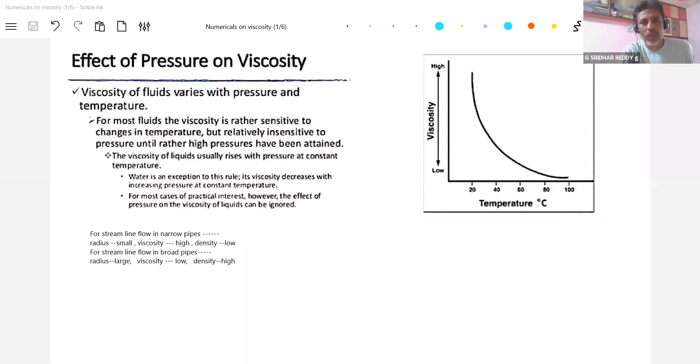Some small theoretical information. Just read once, I'll explain it. Regarding viscosity, how it will vary with temperature and pressure. It's just information, it is there in most of the NCERT books also.

Effect of temperature on viscosity. Okay, first let me explain this, for most of them relatively insensitive to pressure until rather high pressure have been attained.

So now if you look at most of the liquids, what will happen to the viscosity? It will decrease. What do you mean by viscosity? The force of friction that is exerted by the adjacent layers to oppose relative motion between the layers. Where do we see this viscosity? For liquid only. If a liquid is in motion, the adjacent layers will exert force on each other to oppose relative motion between the layers. This particular property is called viscosity.

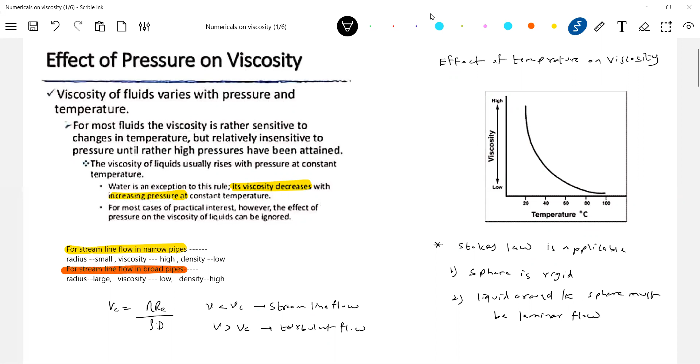No, no, no, don't neglect the radius. How can you neglect radius? It should not be that way, just accept the data. This is one basic condition: the liquid around the sphere must be laminar flow. Next, what should be the boundary of the liquid? Infinite boundary of liquid. The boundary of liquid must be infinite.

These are very primary conditions for Stokes law to be valid, and theoretical things they may ask you. This is data we should have as information, because as a student, I think in exams it's not possible to derive everything, so this theoretical information, if a student remembers it, it'll be much easier. Stokes law is something very important. There's a strict condition: if there's some elastic body and you release it, Stokes law is not applicable.

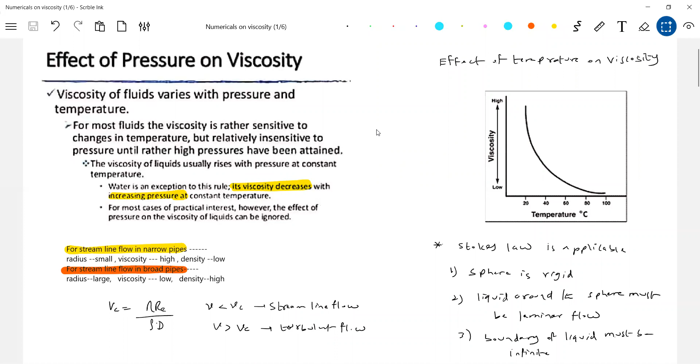Okay, let's take a few simple questions. And now if we have... I'll move this plate.

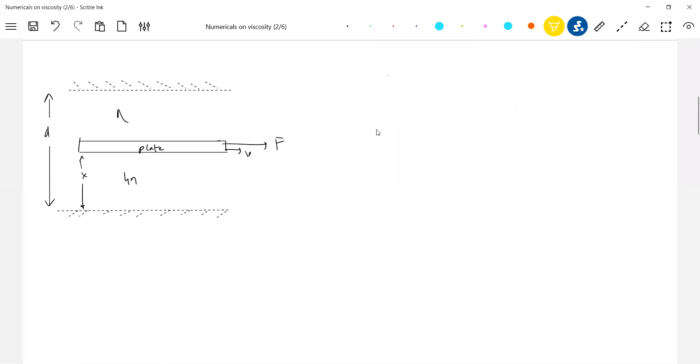What minimum force can I apply so that the viscosity below the plate is 4 eta, and above the plate is eta? At what distance, and what is the minimum force, should I move the plate? Everywhere there's liquid, below there's liquid, above there's liquid. So where should I move this plate so that the liquids will not mix up? I hope you're able to understand.

So with what minimum force can I move this plate? Let A be the area of cross section of the plate, as you can see it's a rectangular plate.

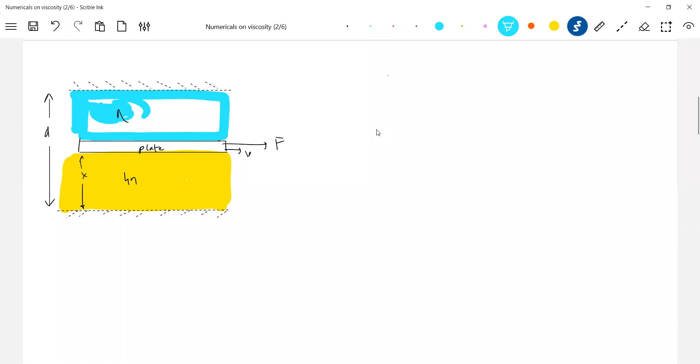Okay, now try to work this out. There'll be viscous drag by both the liquids, no? Let me extend this plate so that you don't get confused.

Try to think, meanwhile I'll finish this shading. The liquids, I'm not permitting them to mix, so you can choose the distance. The coefficient of viscosity below the plate will be 4 eta, above the plate will be eta, and this everything is a plate. The coefficient of viscosity will be adjusted accordingly.

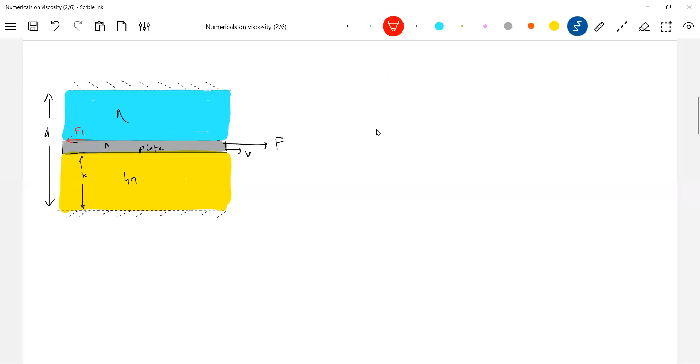Let A be the area of cross section. So there will be two forces acting, one above, one below. So what is F equal to? Total net force should be F1 plus F2. What is F1? Eta A (d minus x) into V... this will be 4 eta A V by x.

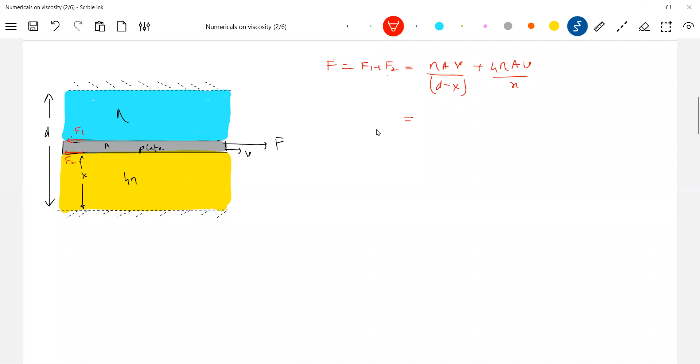If I take eta A V outside, this will become 1 by (d minus x) plus 4 by x, so this becomes eta A V times [x plus 4d minus 4x] by [x into (d minus x)].

Wait, I think it will become a very lengthy calculation, so let me do it here. So what is being asked? What is the minimum force I should apply to drag this plate?

So let me differentiate this. dF by dx is equal to eta AV. Okay, this will be minus of minus, this will be plus minus 4 by x square.

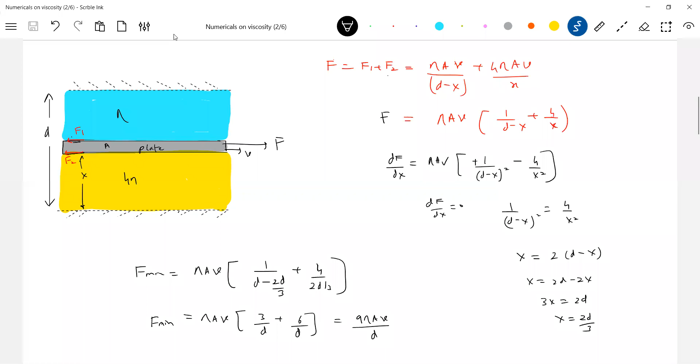Let me take some simple questions. Read it once. Read the question, I'll just shade the diagram so that it'll be easy for you.

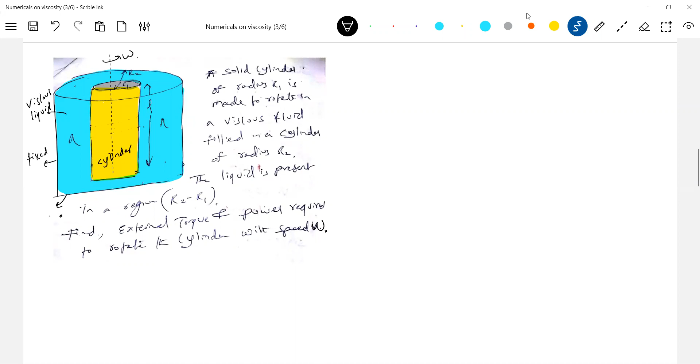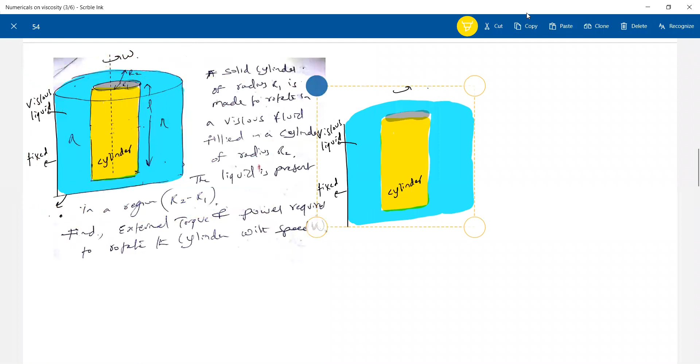Okay, now let's do one thing. Shall we? I think I need a diagram. Okay, I'll redraw the diagram.

Okay, shall we get into the calculation part? Okay, let me assume some DL, I'll write it. We know all the radius that are given. Okay, now what is the torque acting on this one? First, what is the viscous drag acting on this one? So let's calculate the force on this small element.

Df is equal to eta area dA. What is the velocity of that? Will be V. At what distance will it be? R2 minus R1.

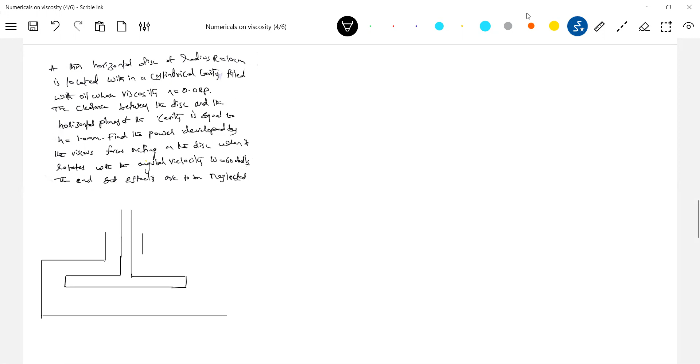Okay, there's a liquid. Okay, fine, this much is there. Make observation of things. So this is that particular disk which I'm going to rotate here.

Hope everyone will know what is a disk. A horizontal disk, that horizontal disk is this one. It is having radius R. There's a viscous liquid.

Read the question and get into it. All these are some good geometry based problems, so you're supposed to make observation of the diagram.

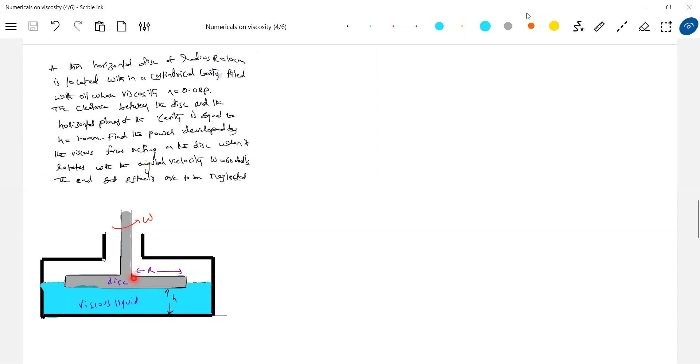What do you mean by the end effects? These things, because the liquid is in contact with the side walls, so these end effects are to be neglected. Only consider the effect of viscosity on the bottom surface of the disk. Top surface, there's no liquid, so no question of that. So as you rotate, the viscous drag will oppose relative motion.

Okay, let's directly get into it. There's a disk of radius r. I'm going to assume a strip.

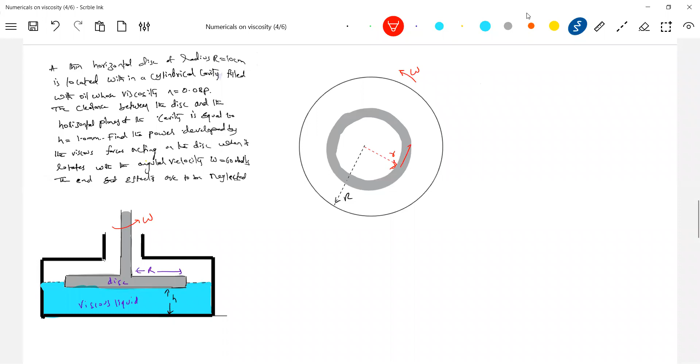Okay, this one, so let me assume a strip. Let the radius of the strip be small r. The disk is having angular velocity omega. The tangential velocity of this point should be like this, and what is v equal to? V equal to r omega. Proceed like this, have this much of information.

Okay, let's get into this one. Where the viscous drag will act - viscous drag will oppose relative motion, so it will act at all points on the ring. So let the force acting be df, that one. So there's a disk, and on the disk at the bottom, I'm assuming a ring of radius r, thickness dr.

Now what is the area of this one? So let's calculate the viscous force acting on the ring - viscous drag on the strip, on the circular strip. How much should it be? Df equal to eta dA into V by H.

Try to follow this. Sir, where is H? H is this one, no? You take any part of the strip, at what distance it will be from the bottom reference - at a distance H. What is V? Tangential velocity, because it's rotating, all points will have the same speed. What is dA? Area of the strip.

2 pi r dr. What is V? V is r omega by H. So this everything will become 2 pi eta omega H will come as it is, so r square dr. Okay, this is the force.

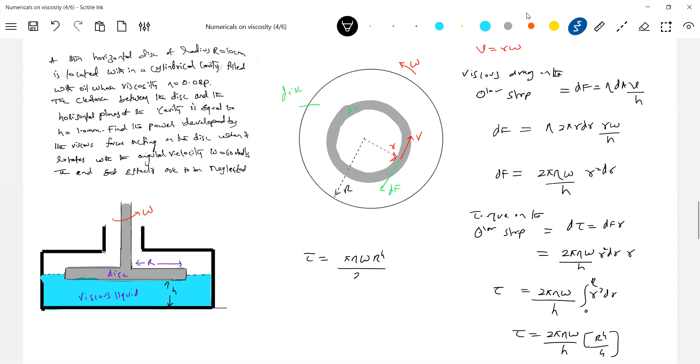So these are the things what we needed. Slowly getting the idea. This one, different types of rigid bodies will be rotating. What should be the disk? It should be rigid. If it is an elastic body, anything will happen. The radius will change. Then no longer we can write this one. So therefore, the disk should be a rigid one.

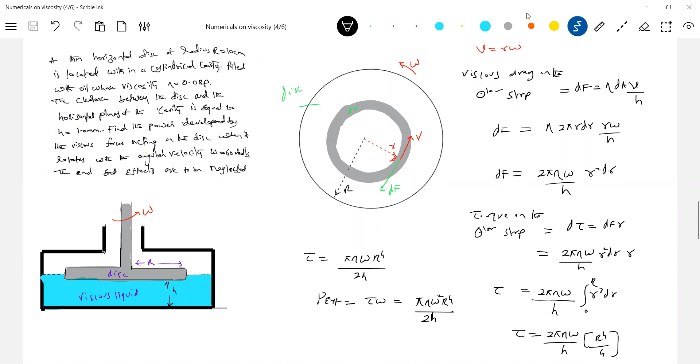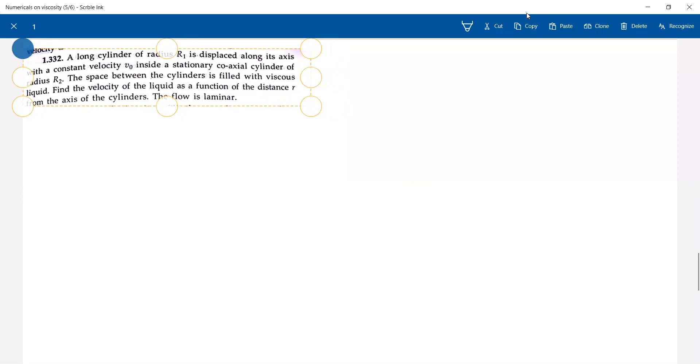Now I'll scroll down. Read this question. I'll give some time because I think read the question first, get some small diagram.

Is a long cylinder. So there is actually a coaxial cylinder. Let's have this one. So this is the long cylinder. Then I'm going to bring another contrast color. Okay, there's another cylinder which I'm going to drag. Both are long, both are long. So let me bring that axis here, and the axis.

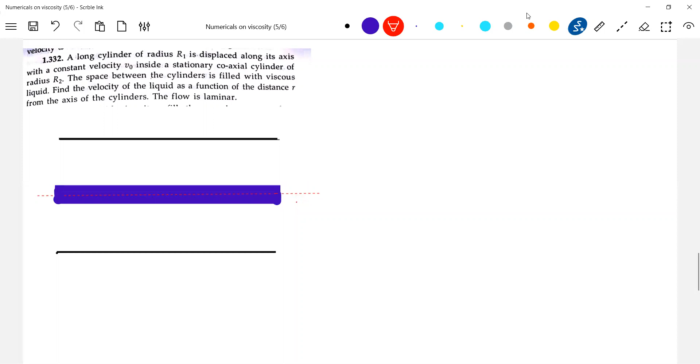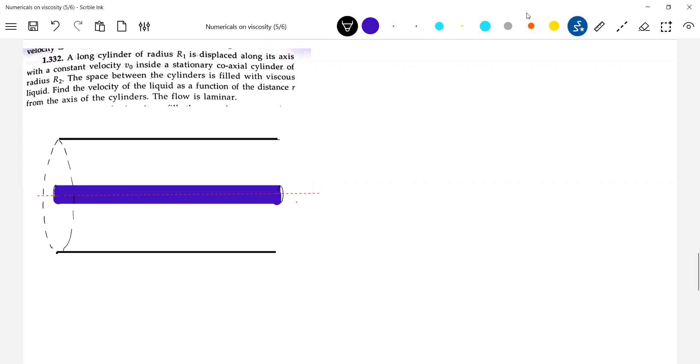Let's get into the. So what is radius R1? R1 is this one. What about R2? R2 is this. At least try to understand the question now. It is moved with a speed V naught. Where is the liquid? The liquid is here. Hope everything, intentionally diagrams are not given.

I'm going to drag this cylinder. So now he is asking that conditions. Once we are able to do such problems, next Poiseuille's equation will be easy for us with the help of these things.

Both are long, okay, I'm just showing some finite length. The space between the cylinders is filled with a viscous liquid. So this is the viscous liquid. So what is this? This is a pipe. This is a solid cylinder.

Able to understand the question now? No. So what is it asking? Find the velocity of liquid as a function of distance r from the axis of the cylinders. So he is asking now, there's a layer. So there'll be a layer. So what is the velocity of this particular layer?

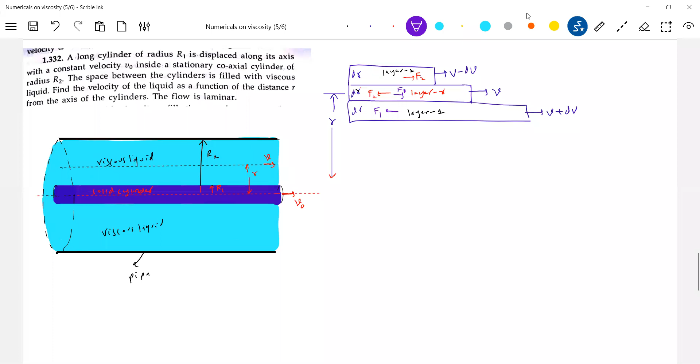It should be F1 minus F2. And what do you suggest, which will be greater, F1 or F2? F1 should be greater, so F1 greater than F2. So therefore I want the resultant force acting on them.

Now what is F1? Eta A. What is the relative velocity between them? Should be dv by dr. Similarly, what is F2? Eta A, V minus V plus, so it will be like V plus dV minus V. I'll write the relative velocity, or the overall expression.

Again, I'll be confusing, the net force I want: F1 minus F2. What is F1 equal to? Eta A, relative velocity between them will be dv by dr, minus of this, this will be relative velocity, eta A. Now please notice here, why the negative sign?

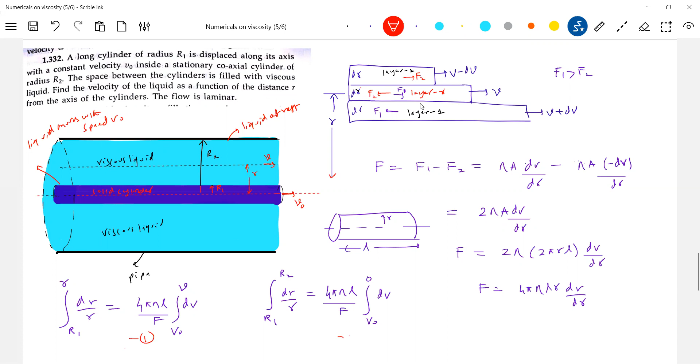So what do we get? dr... so this will become equal to how much? Log of r by r1 divided by log of r2 by r1 equals V minus V naught, minus V naught. Solving this, we'll get the expression for V. I think this will be 1 minus V by V naught.

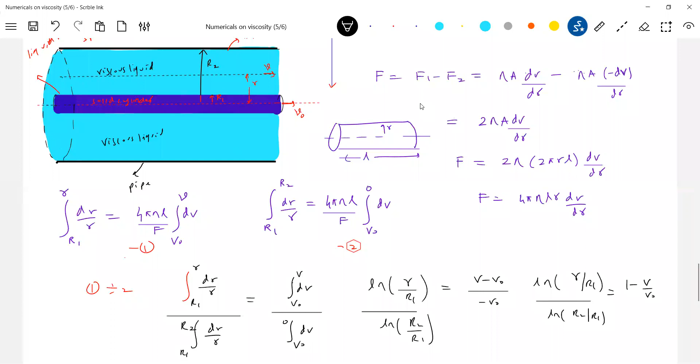So shall I write like this? V naught into 1 minus log of R by R1. This is the expression for the speed V. It's there in Irodov, I just picked up some very good information that's there.

Let me adjust it so that you'll not get confused. Everything is in order.

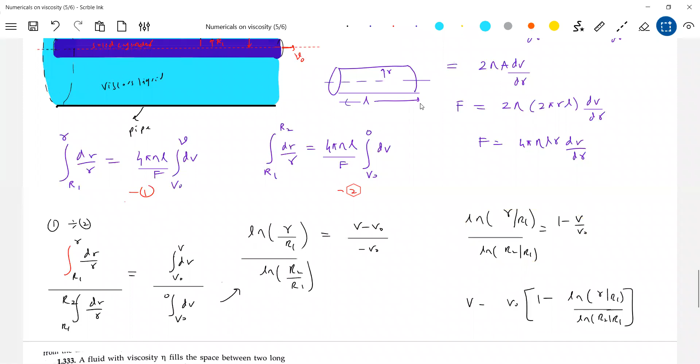Okay, so there's one basic condition we can put. Say these are all some geometry based observations. You should be very good in observation here. There's no concept involved - everyone knows what F equals eta A dV by dr. This diagram is very important.

There's a layer which I am considering, at a distance r, and how the forces are acting there. This is the thinking that will be there.

This nobody wants to explain. No author will explain this in the book because they want students to think. Don't blame the author, it's not that the book is not good. You are teaching very well. See, even if I write a book, why should I explain this? This is what you should think. Once you know this, you can manage the rest.

Please be careful about the things available in the book. Some core idea here and there will not be in proper order. If you can grasp that core idea, you can understand everything.

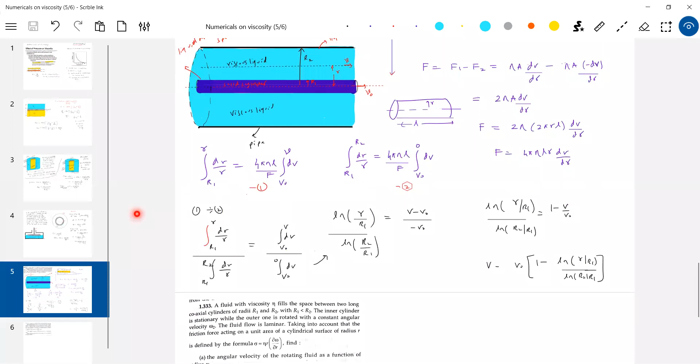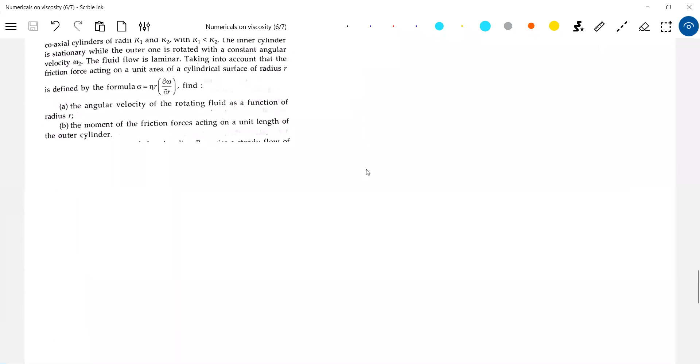Similarly, one more question on rotating fluids. Okay, read the question, let me have water.

Read the thing again. We have to take the two cylinders. He has not given a diagram. Draw the diagram. Okay, let me get into the diagram part.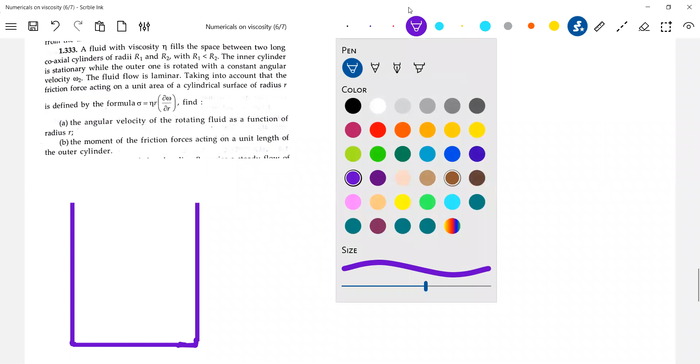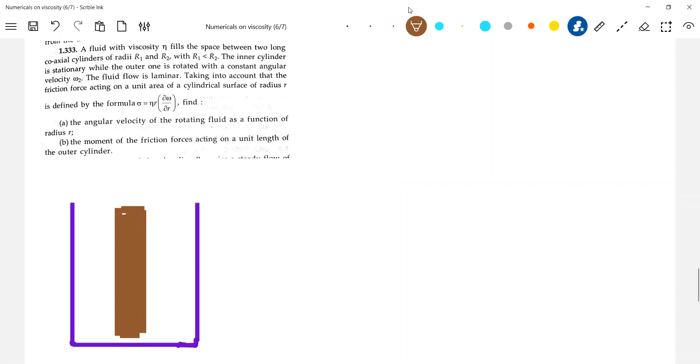Okay, there's one cylinder. Next, again, a solid cylinder is there. Let me bring some other color. These are the two cylinders that we have.

Okay, fine. Look at all the given information now. So what is all the information given, based on that? A liquid with viscosity eta fills the space between the two cylinders. So there's a space.

Okay, now let's get to the condition. There we were dragging the cylinder, here we are going to rotate it - that's the only difference. So this is a fixed one, this is a rotating cylinder, and there's a viscous liquid.

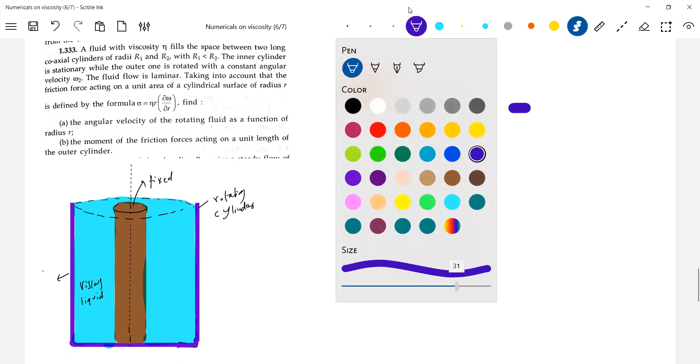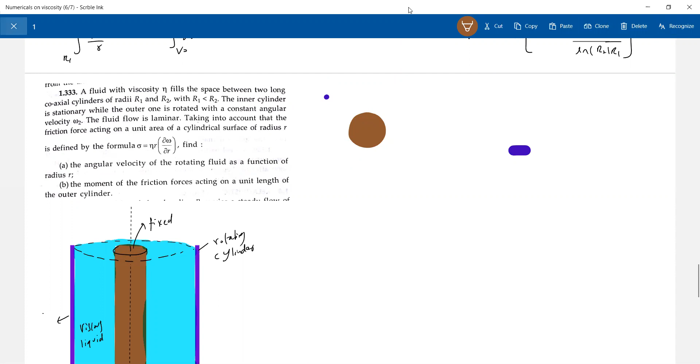So we can have one small diagram. These diagrams are a headache. I'll draw the diagram. Okay, what can you assume? There is some plain diagram at least. Using this, a student is supposed to think.

Okay, this is that liquid. Okay, now I think I have given enough help. So which cylinder is rotating? The outer cylinder is rotating - you can rotate the inner one also. Let me take the outer cylinder as rotating.

So if you want, you can change the problem - let the inner cylinder rotate instead.

So what has to be done now? How to bring that about? The liquid flow is laminar, taking into account that the friction force acting on unit area of the cylinder surface of radius r is defined by the formula. Okay yes, given - we have to, no doubt, derive it.

I will scroll down, I will start the Poiseuille's equation. Similarly you can do this for inner cylinder rotating - fine, you can try this for inner cylinder rotating.

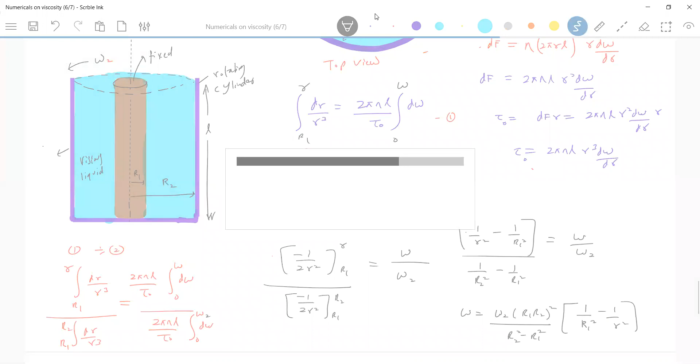Let me introduce the Poiseuille's equation. This what I'll discuss now, it is there only for mains, not there for advanced. This is not there for advanced - Poiseuille's equation.

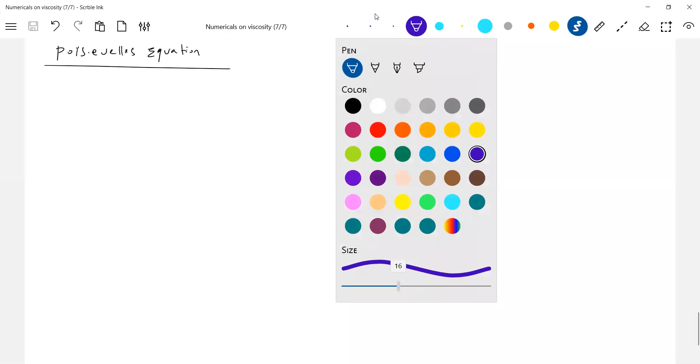This is something very important for the flow of liquids. Just it's a theoretical one, simple, some formulas will come. So what Poiseuille's equation says is, first of all, let's consider a liquid flowing through a pipe. Viscous liquid is flowing through a pipe. Let me construct a pipe. Okay, there's a pipe, liquid is flowing through it. So pressure at this particular point, let it be P plus dP, and the pressure at the other end will be P. So let L be the length of the pipe.

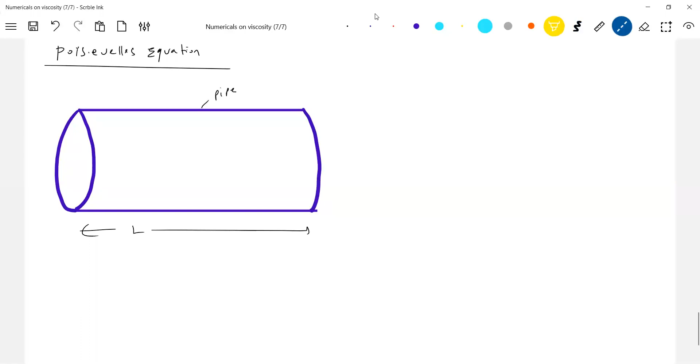All these assumptions we are going to make. Let R be the radius of the pipe. Let me assume another layer here. Now what I'm drawing, it's liquid only - don't take another cylinder, a cylindrical layer of liquid we'll assume it. Find this one, so let this be the radius R.

So what is the radius? Radius of the cylinder, let it be capital R.

These are the assumptions. So we are assuming a cylindrical layer, say it's a thin or thick cylinder? You can see like a cylinder we assume.

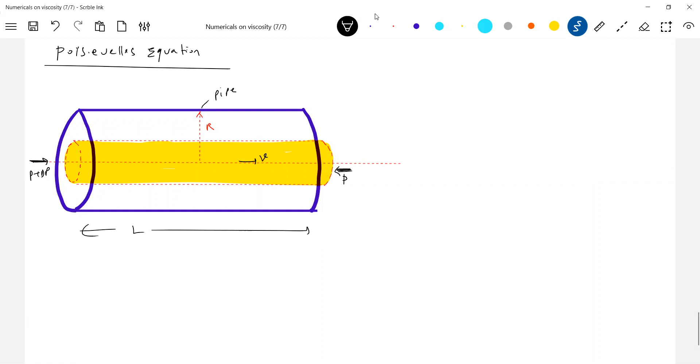Let the pressure at this particular point be P plus delta P, and here let it be P. Who will exert this pressure? An external agent. And what is the state of liquid? This particular liquid has uniform velocity. That cylindrical layer of liquid is moving with a constant speed.

Now, how will that speed be constant? There should be a viscous drag.

So on this particular cylinder, just a simple idea, nothing big, don't bother about anything else. If this is the solid cylindrical volume of liquid we consider, the inertial force, external force, is acting like this - I'll call it inertial force. And the viscous drag is acting in this direction.

If it moves with a constant speed, what does it mean? The inertial forces should balance the viscous forces. This diagram is very important - rest all mathematics will get into this one. Okay, the viscous drag.

So this particular cylindrical volume of liquid, what I considered, is moving with a constant speed. What does it mean? The viscous drag must act. Then who should counterbalance the viscous drag on this cylindrical volume of liquid flowing here? The inertial forces. What inertial force? Due to pressure difference.

Finish out - there's an external agent. I should come into picture and provide that force so that I should balance viscous drag. Then this particular volume of liquid will move with a constant speed. So if I say that in a pipe, a liquid is moving with a constant speed, what does it mean? External force applied on the liquid is balanced by the viscous drags. Will I agree?

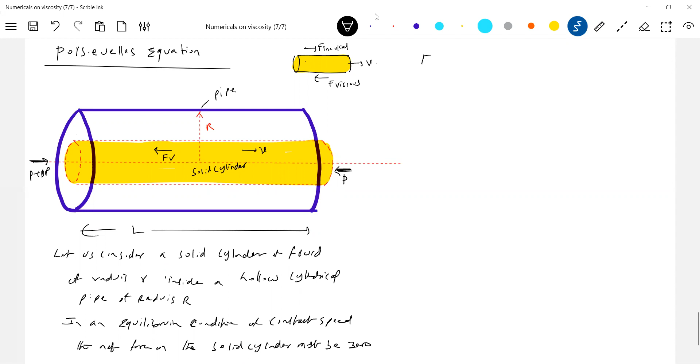What are the forces that are acting? The inertial forces. So therefore what shall we write? The viscous force should be balanced by the pressure force or inertial force, anything, that one. If you want, I'll take out that inertial - let me write pressure, this will be much straightforward for a student. From where does this pressure come? External agent will set it up. What are the viscous forces?

So we know how to calculate, 2 pi - what is the radius of the cylinder we assumed? Small r. What is the length of the cylinder? Capital L. So 2 pi r L is the area. Then dV by dr, minus. What should the pressure force be equal to? Delta P into pi r squared.

So what is here? P plus delta P into pi r squared. Here, P into pi r squared. The difference of that, how much will we get? Delta P pi r squared. All set equal to 0.

So therefore, the expression for dV by dr is equal to - let me write one more step - delta P into pi r squared by eta 2 pi r L. So this everything will become delta P into r by 2 eta L.

The first two steps are the concept. Rest all mathematics, you can see that one. And straight away I'll jump into mathematics and derive the equations.

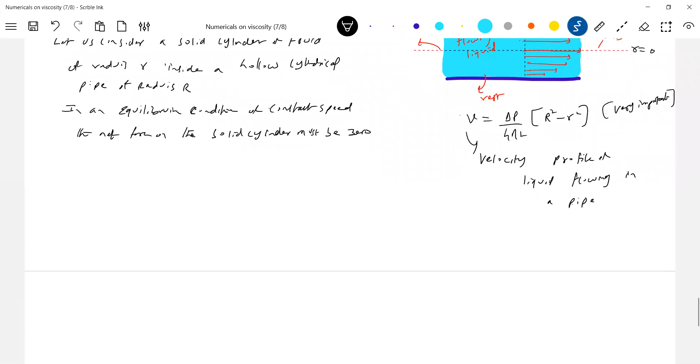Okay, now let's get into the next part. So this is the expression for velocity profile of liquid flowing in a pipe. Next, from the equation of continuity, what is the velocity of different layers? The different layers are having different velocity, no? So let me again proceed with the same.

So if you look at the different layers, they are going to have different velocity here.

So this is the radius. There's a pressure difference, P plus dP. Let it be here. What is the flow rate at this particular point? Shall we write dq equals v into dA? So dA is this particular area.

If everywhere the velocity of liquid is constant throughout the pipe, and a is the area of cross section, what do you write for flow rate? V into a, am I right?

If the velocity of the liquid at different points is different, then how to calculate the total flow rate? Shall I go for integration? What is the flow rate at this particular point? Let it be dq. So dq equals v into dA. What is v? Delta P by 4 eta L

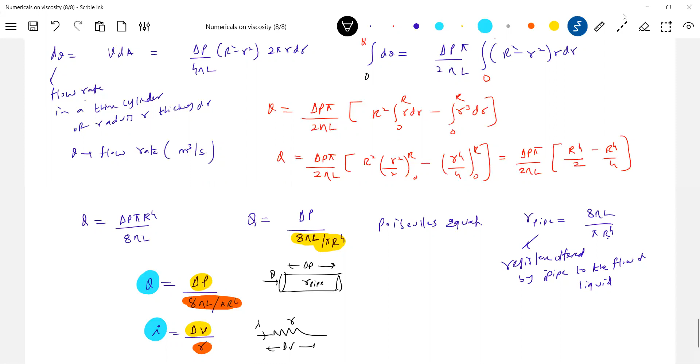The derivation, if you find difficult, you can skip it directly. Only the end formula is needed. So what is the resistance of pipe? 8 eta L over pi r to the power of 4. Okay, let's do one thing.

So what is the use of this? Suppose, just like in Ohm's law we do all these connections, similarly pipes we are going to connect. Is it just like that? Can anybody just come and connect? No. The particular person who is going to connect pipes must have all this background knowledge.

What should be the pressure difference available? Then what is the diameter of the pipe? Then how much water will flow? So what is Q? Amount of water flowing per second, that is what capital Q is.

Simplest way to see it: if you're finding flow rate difficult to understand, it's simply how much amount of water flowing per second - that is what Q is. The flow rate across a pipe depends on all these quantities.

So if you want to design, first a person who is going to lay the pipes - what will they do? What is the pressure difference across the pipes available, across the ends of the pipe? Then what amount of liquid per second you want? What amount of water per second you want to flow? Length of the pipe - this is fixed, we can't change capital L, no?

And eta is fixed, pi and 8 are fixed. I am going to choose the radius. The radius of the pipe will provide that particular value of Q.

Getting it? That's why, look at it like in Ohm's law. For drainage connections, we'll use one pipe. For water flow, we'll use one pipe. And for water heaters and geysers, there will be one diameter used. Why are different diameters used? Keeping all these parameters in mind.

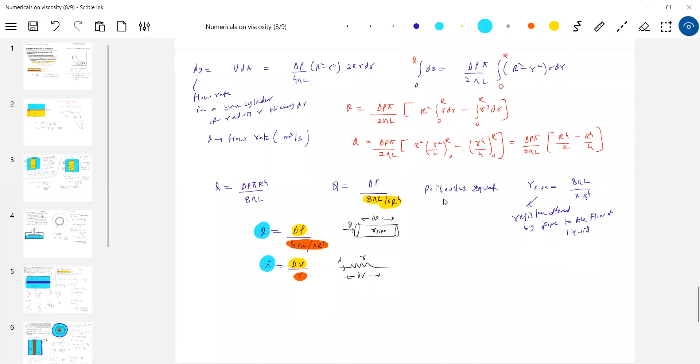Okay, let's go for pipes in series now. If two pipes are there in series - capillary, nothing but capillary or pipes are in series. If there are two pipes there which are in series now.

This is having length L1, L2. Let me replace with symbol A, it will be easy for us. There's a pressure difference between them, P1, P2. Let's assume that. Now I want to replace this with a pipe, an equivalent pipe of radius, say length, let it be L1 plus L2.

So that the same flow rate will come. So what was the flow rate here? The same flow rate must be there. What should be the radius of this given pipe?

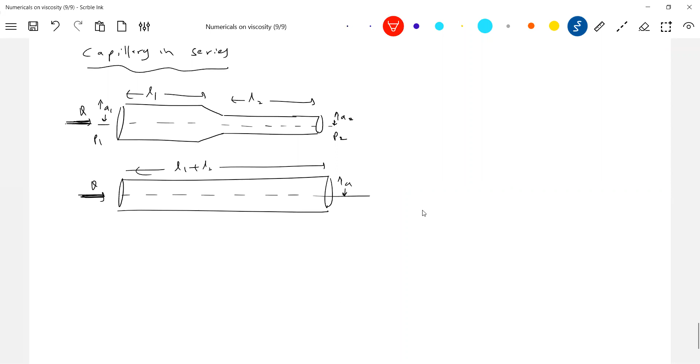You can ask, why are you replacing? Are you able to see this? This is the one pipe. Say this pipe is made up of copper, this pipe is made up of iron. I want to replace with a plastic pipe.

You can ask why you are replacing copper and iron, which are costly, with plastic, which is very easy. In designing, okay I'll take that one, but finally I want to implement this. I want to replace - or you can say this is plastic, this is iron, and iron will be costlier. So I want to replace the total with plastic only.

And that too, I don't want something like this joint. Why joint? A joint we show like this - this will be very narrow. Here I'm showing this one. Sir, what about this length you're neglecting? The joint will be like this. The joint will be made, but the thickness of this joint you can neglect at our level.

So I want to avoid joints. Tell me why there should not be many joints - because any leakage can occur here. So I want to replace this with one equivalent pipe. What should be the diameter of that pipe, or what should be the radius of that pipe? So shall we say this is like a series?

Delta P1 pressure difference, okay we'll do one thing - Delta P2, we'll write like this here. Tell me what will be constant. So what amount of water flowing through this combination of pipes, the same amount of water will flow here.

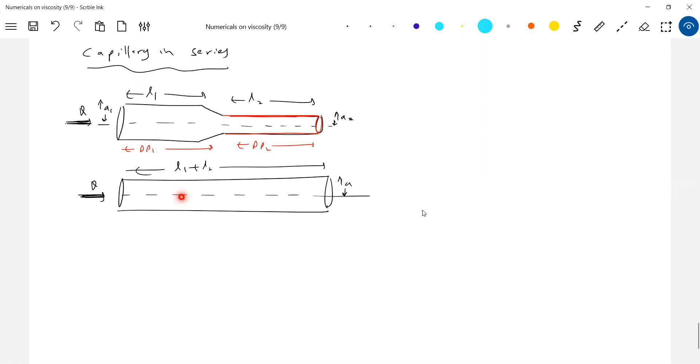And the same pressure difference I'm going to maintain. So first I'm going to write it here now. Delta P equal to delta P1 plus delta P2. What should delta P be equal to? Flow rate into resistance of this pipe, should be equal to Q into R1, Q into R. R is not radius, it is resistance — we have changed the symbols. Same flow rate, what amount of water per second is flowing, same amount of water per second it is flowing.

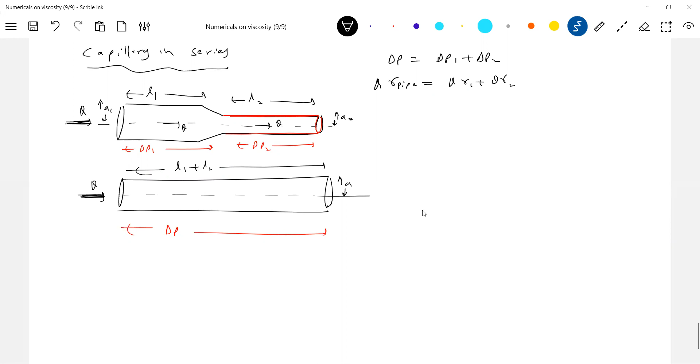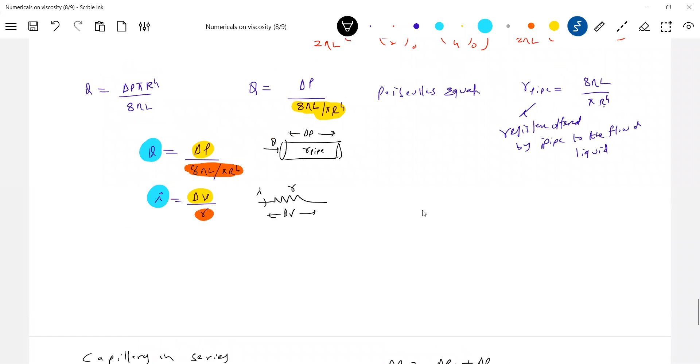Therefore, what should be the resistance of this equivalent pipe? It should be the sum of resistance of the individual pipes connected in series. Now, what is the resistance of the pipe? 8 eta L1 plus L2 over pi r to the power of 4. Can you remember this formula? 8 eta L over pi r to the power of 4. Then what is R1? 8 eta L1...

Expression for a to the power of 4 is needed. So R1 to the power of 4, R2 to the power of 4, L1 plus L2 by... okay, this should be the radius of this particular pipe.

So if you want to replace these two pipes with an equivalent pipe, what should be the radius of the pipe? You have to follow this particular formula. In the designing stage, what we do is design later on to reduce the cost — I should go for this equivalent. So two pipes are in series.

What is the effective resistance of this pipe? It should be the sum of resistance offered by the individual pipes. This pipe will offer some resistance to the flow of liquid, and this pipe will also offer resistance to the flow of liquid. Then what is the resistance offered by the sum of these two? Okay, when pipes are connected in series, tell me what will be constant? The flow rate will be constant.

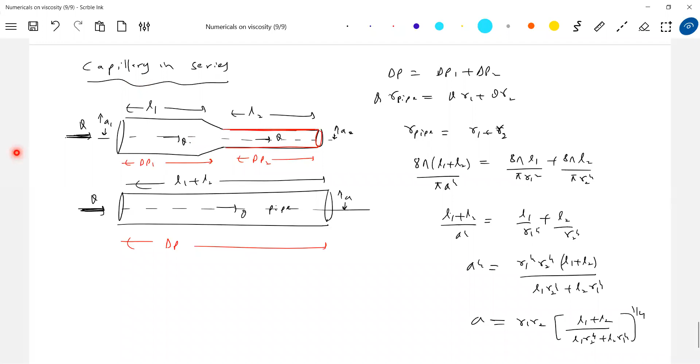So capillary in series — what are the important points? Flow rate will be same. Then what will be the difference? The difference will be delta P1. The pressure difference will be this one. Now, is there any relation between delta P and this one?

Delta P1 — can we write it in terms of anything? So let me go for a few more steps. Delta P1, shall we write Q into R1? What is Q? I'll write it nearby. Q, what shall I write? Delta P by R. What is R? R1 plus R2.

Okay, now if you know the total pressure difference, you're going to apply this. Suppose the total pressure difference is delta P. How much of the pressure difference is across the individual pipe — you can use this particular formula. So what is the meaning of this? Suppose this pipe is there. The pressure difference across the total pipe is this much here, and this is the resistance of this pipe. So how much of the pressure difference is across the individual pipe? How to find out? Okay, this is the formula.

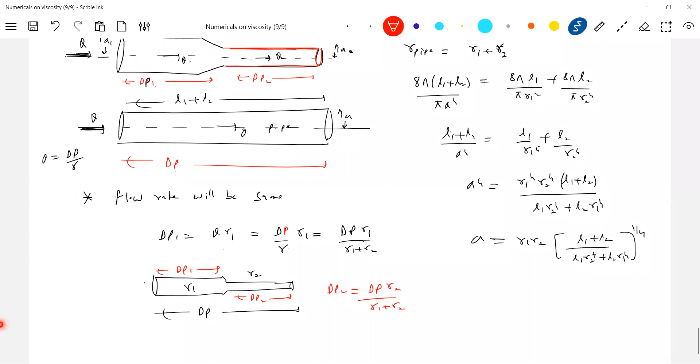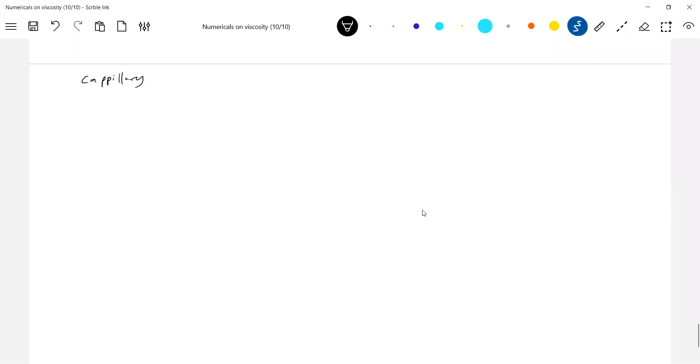This will be it. What about parallel similarly? We'll take it up — let me finish off this also. Parallel — Capillary in parallel. Now why capillary? Because rather than saying pipes, no, this is the symbol, this is the method we are using — Capillary in parallel. It doesn't mean that they should be of small diameter, or pipes in series or pipes in parallel. There are two pipes here. There's a pipe.

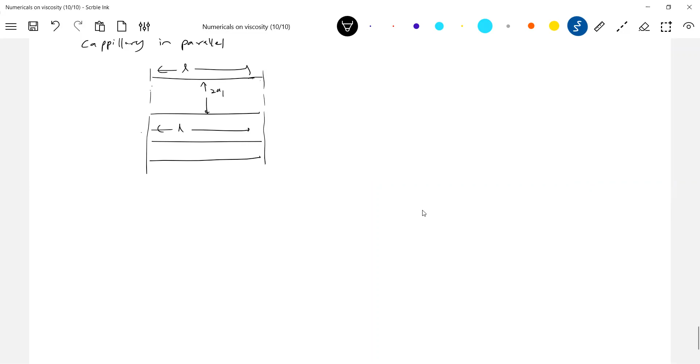Both must have the same length, but the radii will be different — 2A1, 2A2. So now liquid will rush here. So what will happen to the liquid? Able to assume now? So I think I can... Yeah, so the liquid which is flowing, a part of the liquid will flow like this, and the remaining part will flow here. So what is the pressure difference? The pressure difference is delta P. This should not be there.

Some amount of liquid will pass through this pipe, and some amount of liquid will pass through this pipe. The pressure difference across both is the same. I want to replace this with an equivalent pipe — let me bring it here. These two pipes, I want to replace with an equivalent pipe of length L, with the same pressure difference. What should be the diameter, so that this pipe makes the same amount of liquid flow? So practically, the diagrams will be like this. If I draw more pipes now, you'll get confused, so that's why.

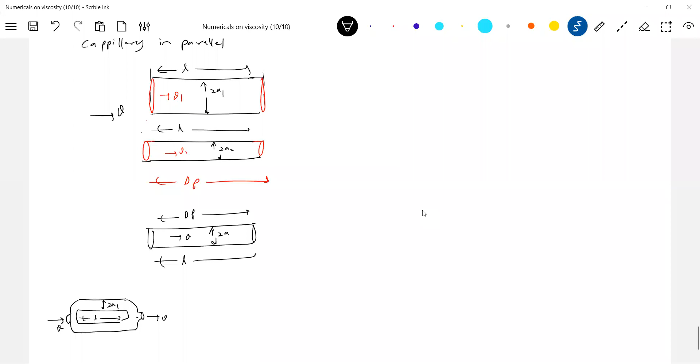Fine, so the liquid will come here, Q. Both pipes are having the same length. This one has diameter 2A1, this has 2A2. I want to replace this with an equivalent pipe.

So now you can ask questions, sir. Why say this will cost 100 rupees, this will cost like 80 rupees, and this will cost around 90 rupees? So how much are you going to save? You're going to save some amount, no? Instead of 2 pipes, you can bring 1 pipe.

Able to understand? Instead of these 2 pipes, however much liquid they're making flow, the same amount of liquid can be made to flow through this one single pipe. So I want to replace that pipe here.

So they are in parallel. What do you mean by parallel? The liquid will branch, you can see this. The liquid which is coming now, some amount will pass here, some amount will pass here.

Now what is the first thing you can write? Q is equal to what? Q1 plus Q2. What is Q? Looking at this, delta P by resistance, delta P by R1, delta P by R2. What is delta P? It gets cancelled. So 1 by R equal to 1 by R1 plus 1 by R2.

So if the liquid branches out, then they're said to be in parallel. If the amount of liquid flowing through both the pipes is same, they're said to be in series. So what is the value? This 8 eta L by pi r to the power of 4.

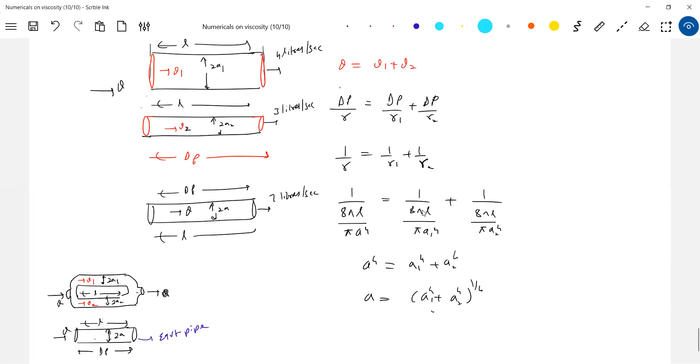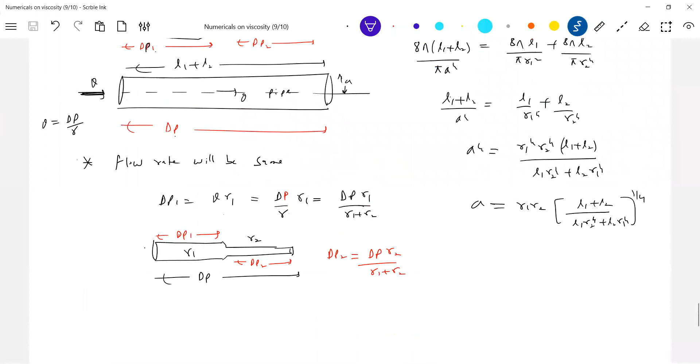So this is like Kirchhoff's series and parallel. So I suggest you remember the formula. Poiseuille's equation derivation may not be needed. Directly start with this formula. Series, parallel, and take help of Ohm's law. If series, similar to the analogy, current will be same, so flow rate will be same. If they're parallel, current will branch, flow rate will branch.

Okay, recollect all these things. Tomorrow I'll continue from here.